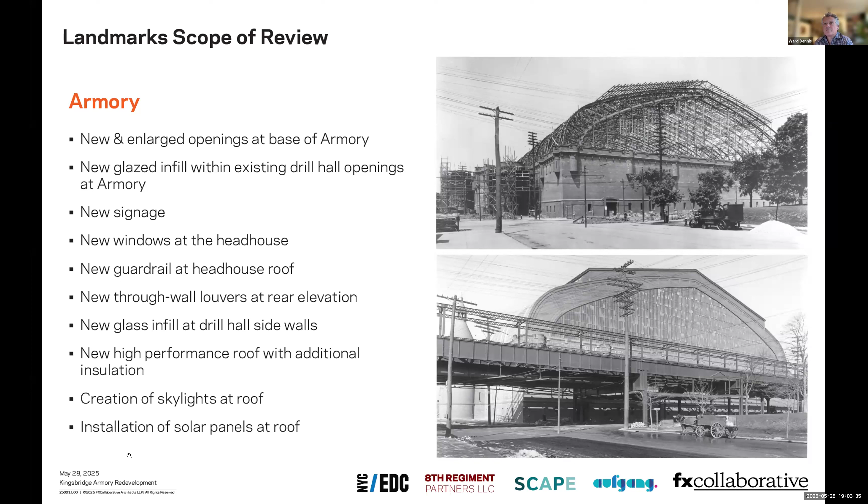And then in terms of the new construction on the north end of the site, the 2 existing National Guard buildings that you can see in the 2 photos on the right, both of which are not historic buildings, will both be demolished, and then a new residential building will be constructed along West 195th Street. There will be some connections between the new residential building and the armory with some associated removals of masonry at the armory.

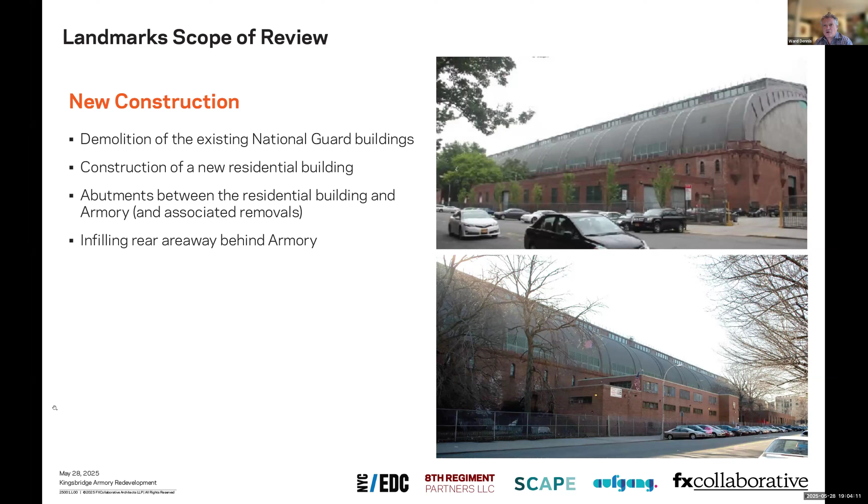And there is an areaway along the north side of the armory that will be infilled as part of this work.

And then finally, you will be seeing proposals for new landscaping and site work throughout the site, particularly along the south and west sides of the building. That part of the work is also part of Landmark's review.

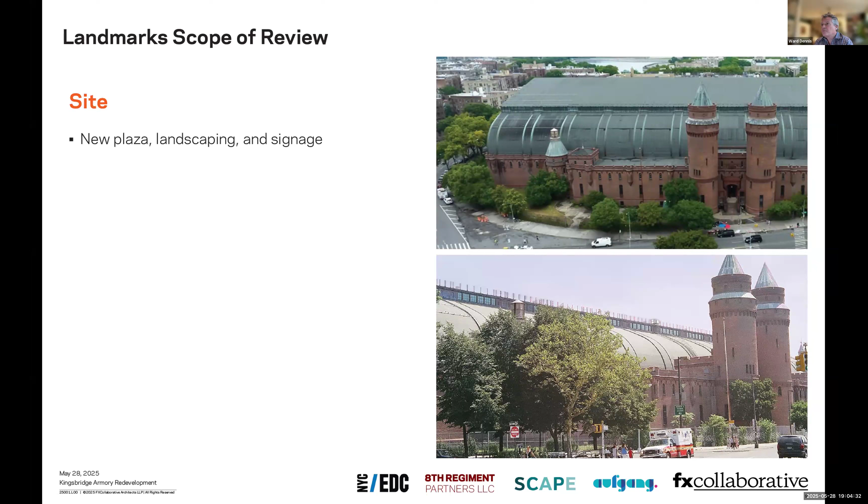So I will hand it over now to Austin to take us through the design.

Thanks, Ward. So we're going to shift now to the design vision of this project, which really begins with a set of guiding principles: building on the Together for Kingsbridge plan, making this armory accessible to as many people as possible, creating jobs, preserving history, bringing on union labor, and bringing complementary investments to this community through a variety of uses and affordable housing.

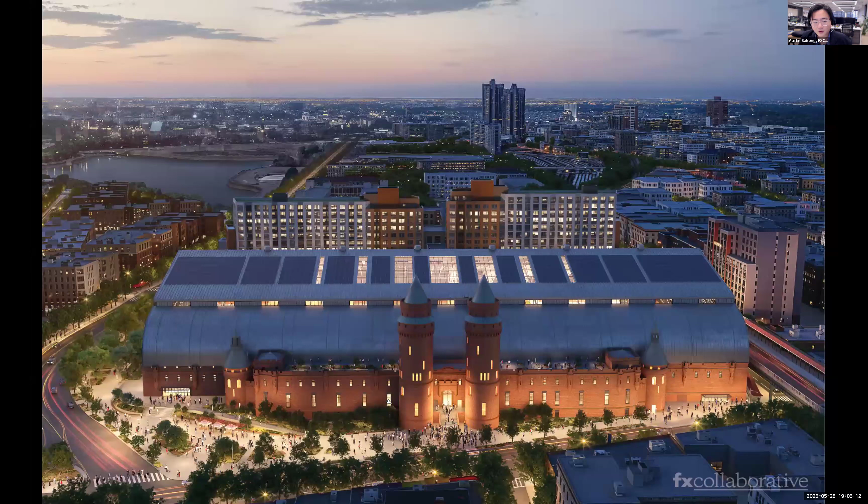So what does all that look like? We are very excited to share today how we're activating this historic structure, and we're going to get into all of it. But before we go inside, we want to start with everything that we're designing outside the armory first.

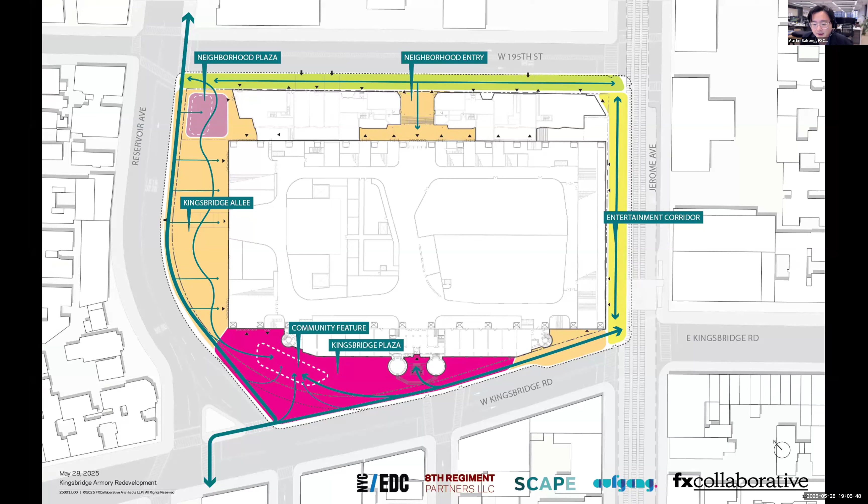We're designing this with our amazing partners at Scape Studio, and we are designing all of these open spaces, all the active public spaces that will connect to and engage the neighborhood around the site. It's a very large site, so different parts of the site are doing different things, but all of it through one cohesive open space plan and vision.

So for example, on Jerome and 195th Street, we're expanding the sidewalk. We're moving the curb out to make it safer for pedestrians. And then along Reservoir, we're creating a play plaza for kids to come over after school with a water feature.

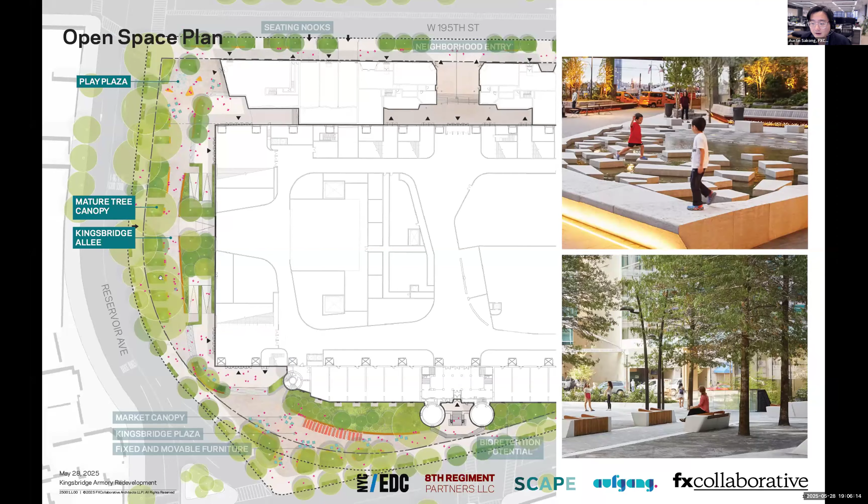We're preserving these amazing mature trees that are already there to create an urban grove, the Kingsbridge Allee, where you can sit in the shade of these amazing trees that are already there, which we're layering with additional trees and shrubs and seating.

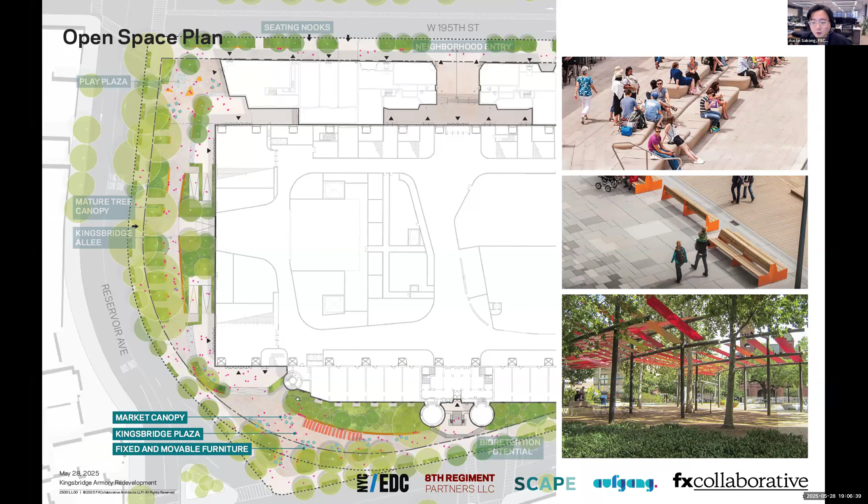And then along the Kingsbridge corridor, you may be familiar with that sort of bizarre asphalt triangle that sticks into the road. We're actually capturing that area to create a large open plaza with benches and steps and plantings and movable furniture and a new canopy structure under which you might set up a pop-up market stall or just hang out, or maybe there's a merch table for a concert that's happening inside.

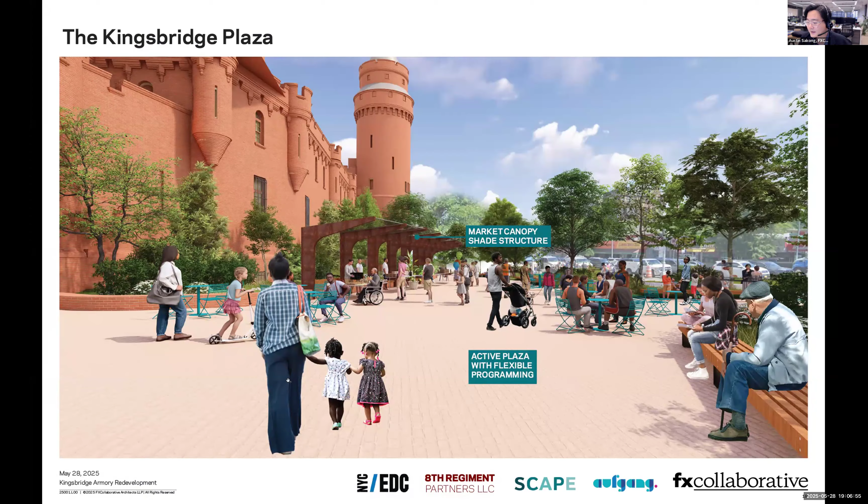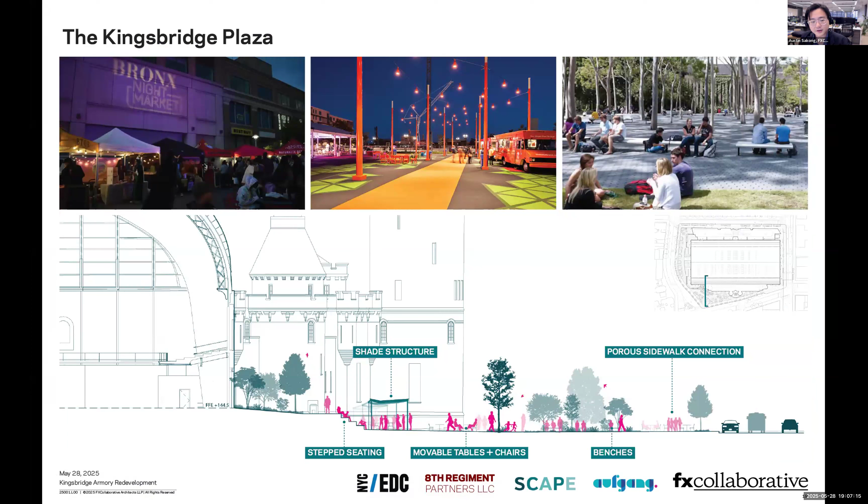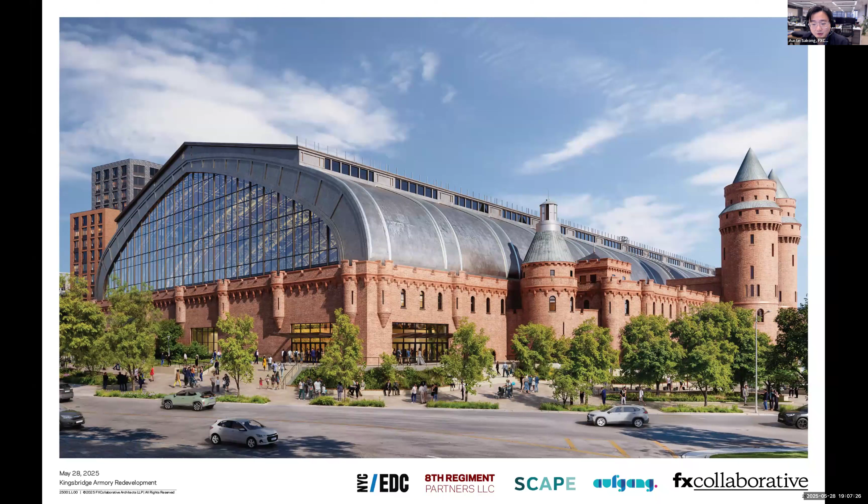It's supposed to provide a function that the neighborhood doesn't already have. So all in all, we are talking about almost an acre and a half of new, active, flexible, open public space right here in the Kingsbridge neighborhood. And this is just the outside.

Then there's all the stuff that's actually going to happen inside the buildings. And I have to say, we're very excited about this amazing set of programs going on in this project. We're talking about a new live events concert venue, big enough for 17,000 people, new entertainment and recreation spaces for people of all ages, music recording studios, cultural spaces, dedicated community spaces, spaces for light manufacturing and tech, and it's a lot.

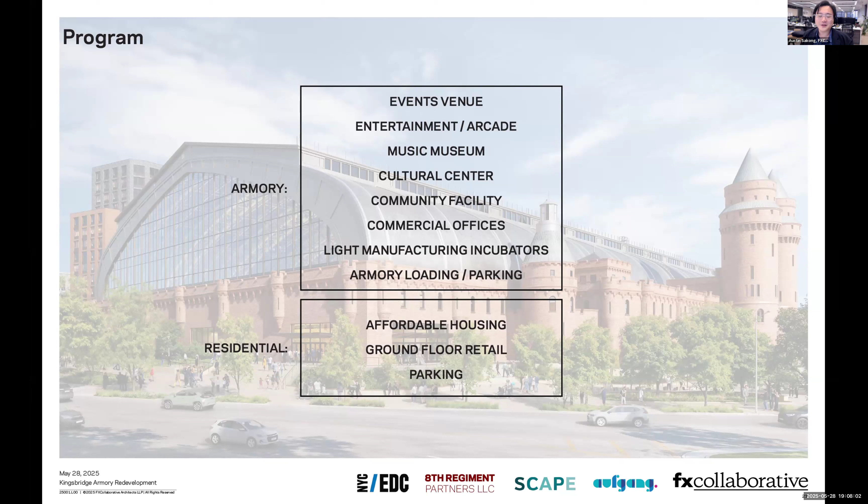So what does the armory look like when you start filling it up with all those amazing programs? Because this is what the armory looks like now.

And at the end of the day, we believe that no matter what we do, no matter what we design here, the best thing about this project is always going to be what's already there in the project, right? This amazing historic space, this amazing historic structure.

So as we started designing for all of those programs that I just rattled off, what we realized is that above all, we have really two important jobs that we have to keep here. One is to not mess this up, not screw this up. And two, make this as accessible as possible to as many people as possible. That's it, right? Do no harm.

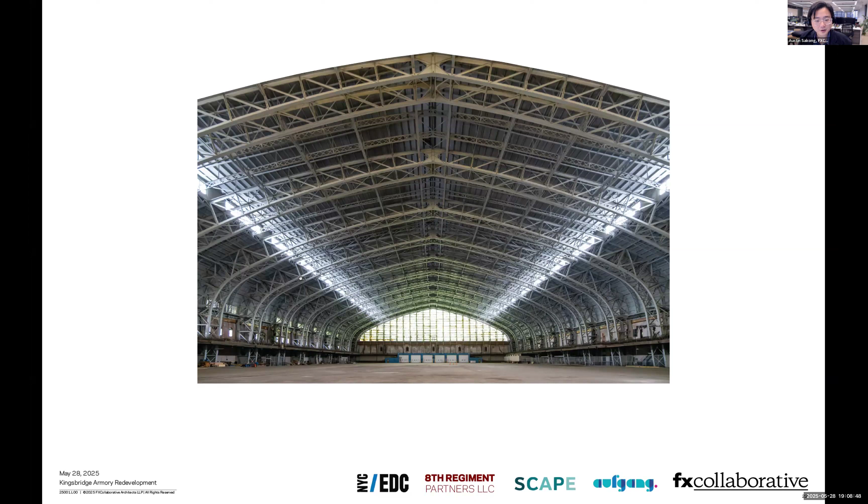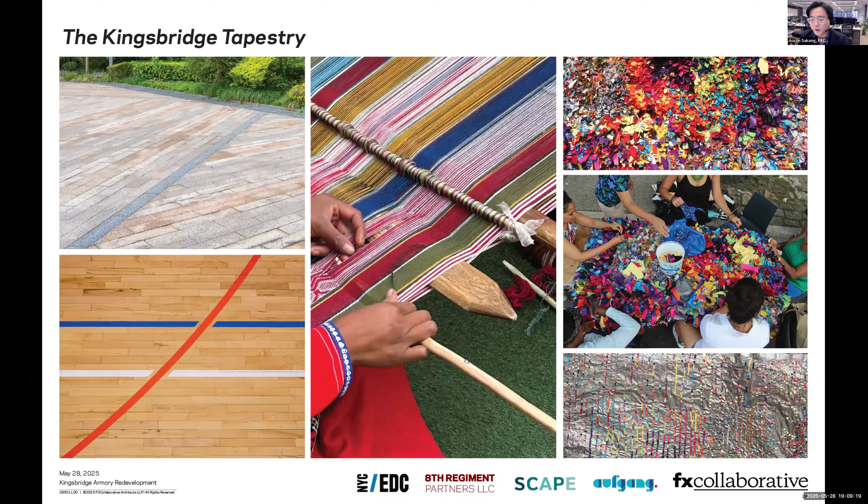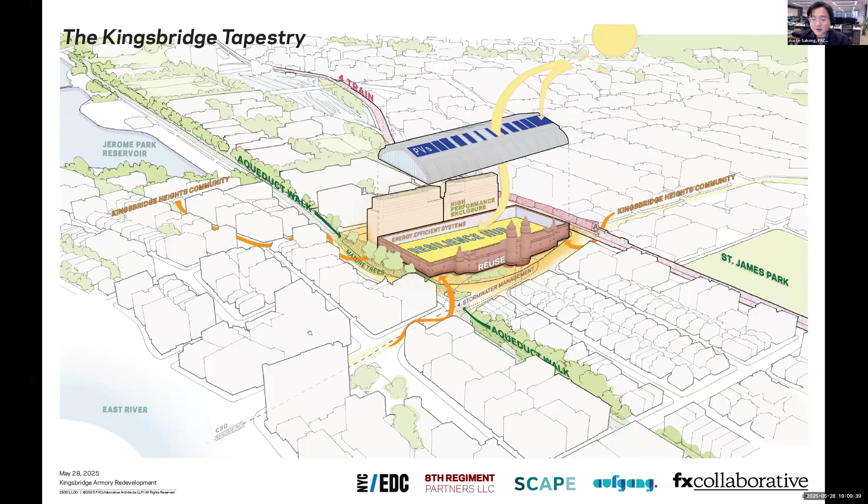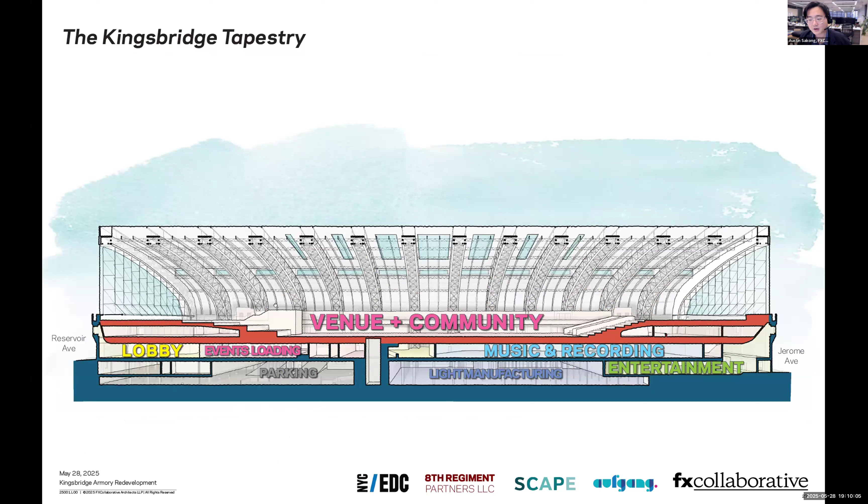It's floating inside the drill hall and bringing together, knitting together all of these different uses. So this is a kind of architectural section through the whole thing. I'm going to take you now through a series of plans, starting from the very top and working our way down. So this is the top floor.

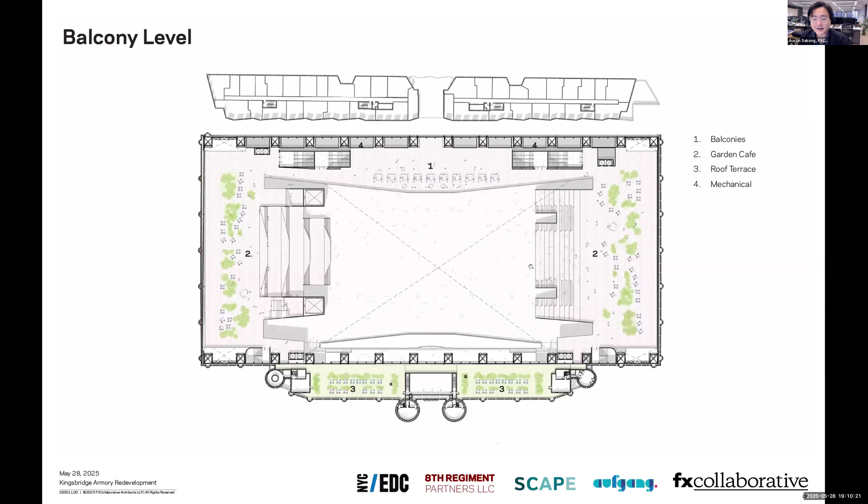This is the kind of balcony level, where we have balcony spaces that look out through those big arched windows, iconic arched windows on the two ends of the building, with garden cafes and community steps that lead you down to the venue level. And so here's the venue level.

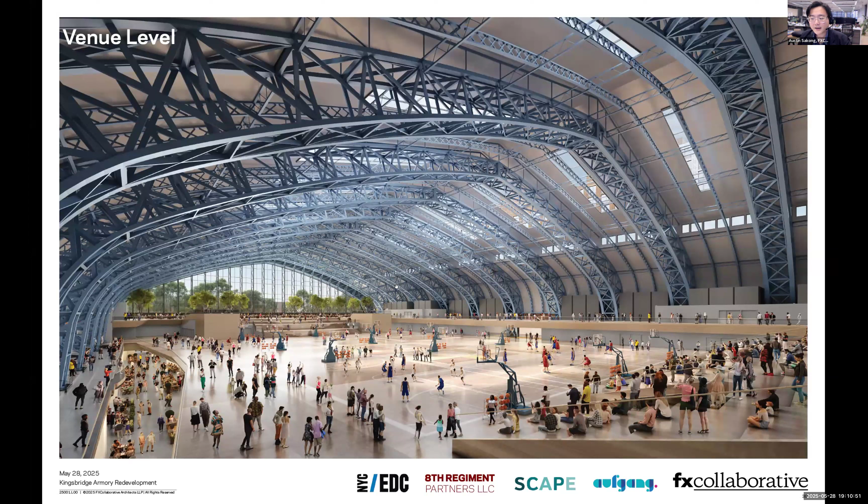So I said before that we have two jobs, right? To not mess this up and make it accessible to as many people as possible. So you can see how we're preserving this huge expanse of space. We're not mucking it up. And we're preserving something that we think is completely unique in this city. And it's super flexible.

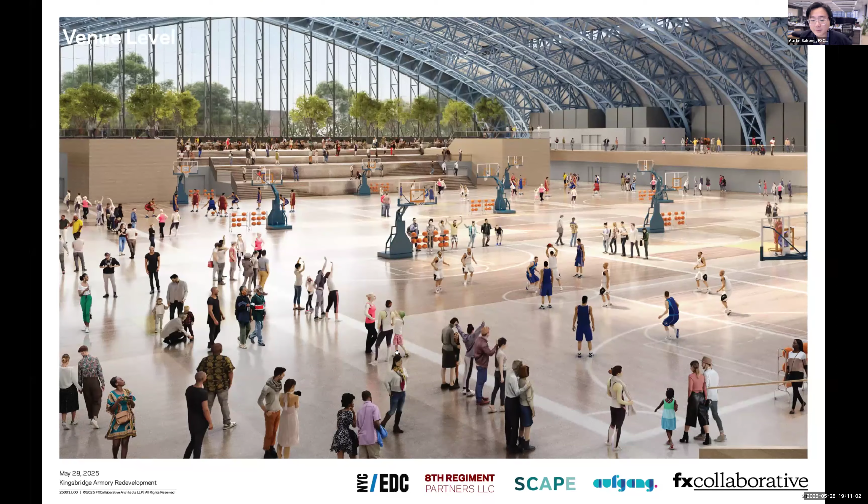So if you're a teenager who needs a place to hang out after school, maybe this is where you have practice. Or maybe this is where you are here to see your favorite artist on tour, because the Kingsbridge Armory is now the premier events venue for anyone who wants to perform in New York City. Maybe this is where the next great Bronx flea market wants to set up, or maybe this is where you have high school graduations or university convocations. You could do anything in this space.

Below that venue level space, this is really where the armory is accessible from the street. And again, the head house would be dedicated for community groups, which could be accessed directly from the historic entrance.

So these are all the community group spaces dedicated. And then the drill hall would become a kind of public concourse, activated with food and drinks, retail, entertainment, and culture.

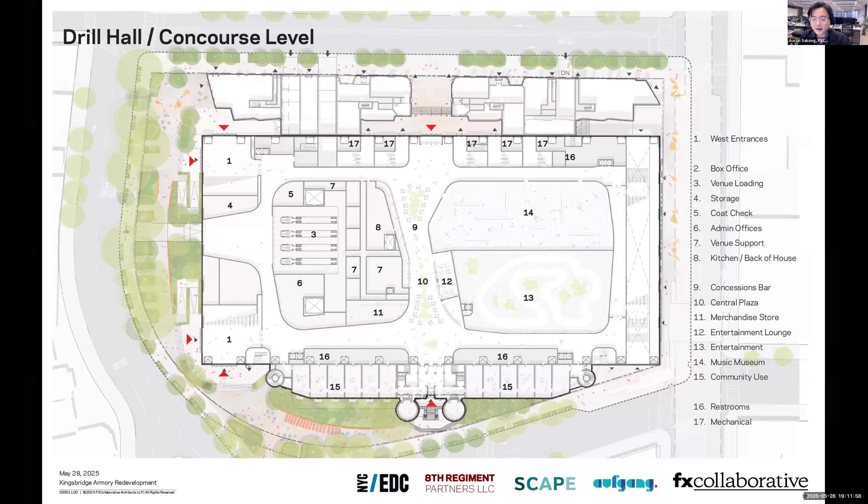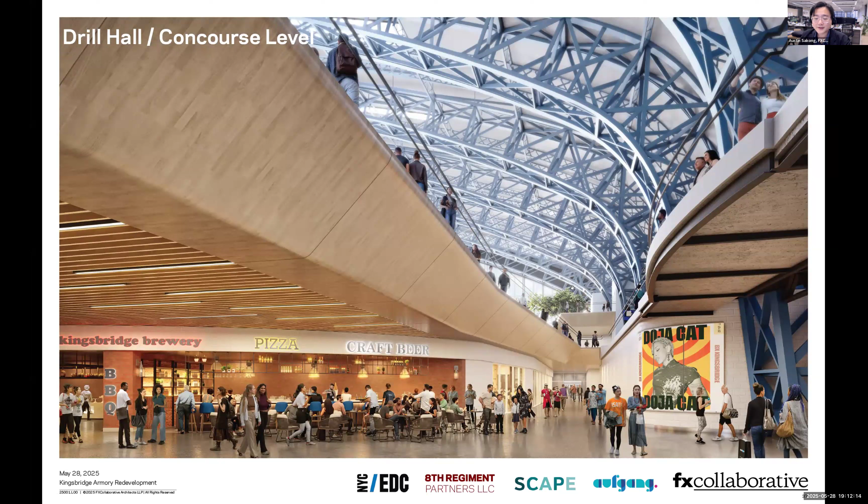This is where you'd come in directly off the street, with entrances at the corners of the buildings. You could go directly up to the venue level, or continue at the concourse level, where you can see the edge and underside of the tapestry. Even from here you could look up and experience the historic armory arches, or get a drink and grab a bite, much as you'd find in food halls elsewhere in the city.

And then alongside those spaces in the drill hall, anchoring the historic head house, there are dedicated spaces for the Northwest Bronx Community and Clergy Coalition, the Kingsbridge Heights Community Center, and Dominicanos USA.

Below those levels there are two more levels, because the sidewalk actually slopes down towards Jerome. So we have public entrances to the concourse on Jerome one level down, and we're activating the full width of the armory along this street, with new entrances and new storefronts.

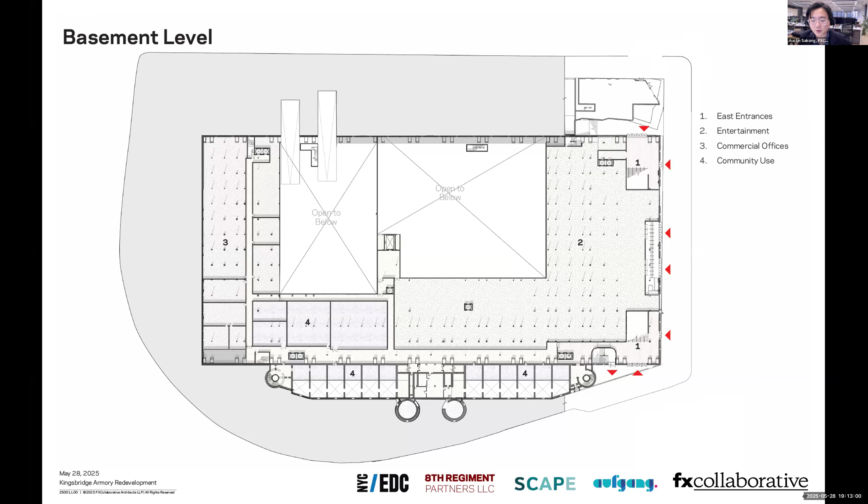Finally, a level below that, new parking and general building loading. These lower levels will also have additional programming: entertainment spaces with things like go-karts, arcades, bowling, esports, laser tag, birthday parties, and also a large new hub for light manufacturing for Bronx-based makers, artisans, entrepreneurs, and innovators.

So that's the big picture vision for the armory. To make this all happen, as you know, we've submitted our drawings to City Planning for ULURP.

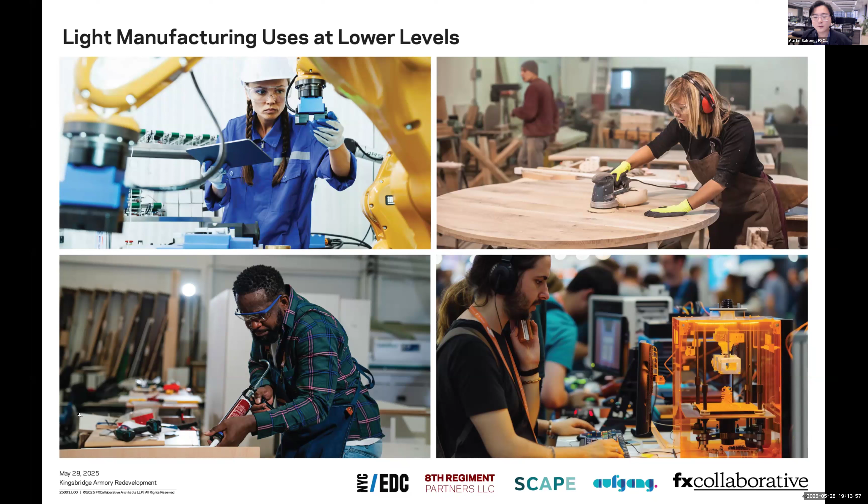In addition, as Ward noted, we are submitting drawings to the Landmarks Preservation Commission. I'm not going to do a deep dive of all the LPC drawings, but I want to show a few key samples from that set, which we're submitting to CB7 as an appendix, to give you a sense of what we're proposing relative to the historic structure.

Big picture, our attitude is wherever there's intricate, ornamental, historic stuff, leave it alone. So other than some signage on the towers and out in the landscape, all we're doing on the historic head house is replacing windows and making repairs wherever needed.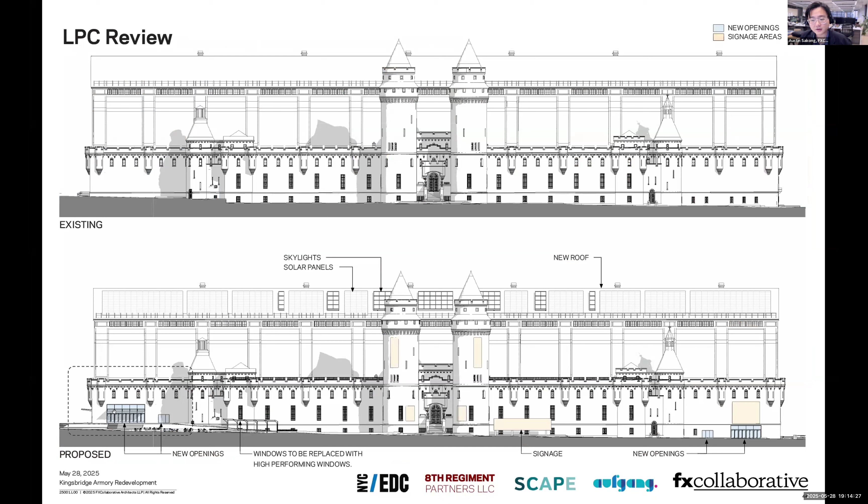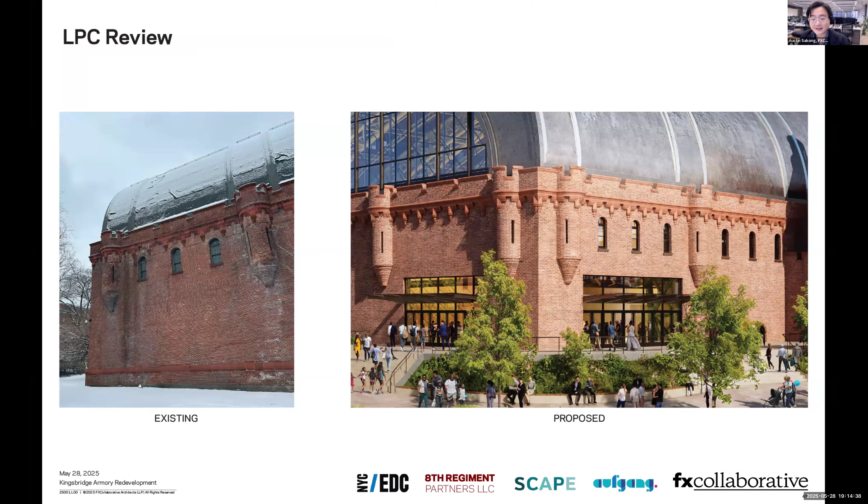Then at the corners—not in the head house, but in the body of the drill hall where we have plain, unadorned masonry—we're introducing new primary entrances, universally accessible, unlike the existing historic entrance, with new glass doors and new glass canopies. On the two ends, we're proposing to take down that awful corrugated 70s plastic in the big arch windows and replace it with glass to bring natural light into the venue.

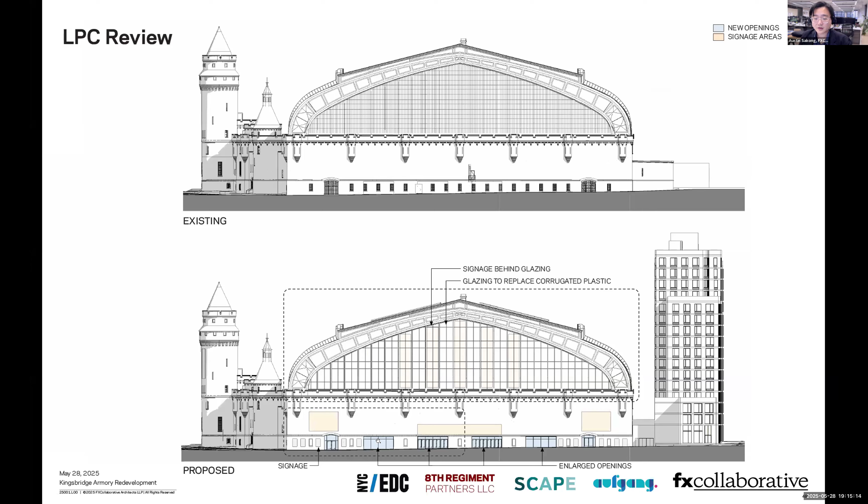And again, introducing new openings in areas of plain masonry, like here on Reservoir Avenue. On Jerome, similarly, we'll reuse the historic arched entrances at the corners, but activate the street level by turning a few of these small, punched windows into floor-to-ceiling glass storefronts, which you can see more closely here—turning this into this. You can also see where we are reserving space for signage.

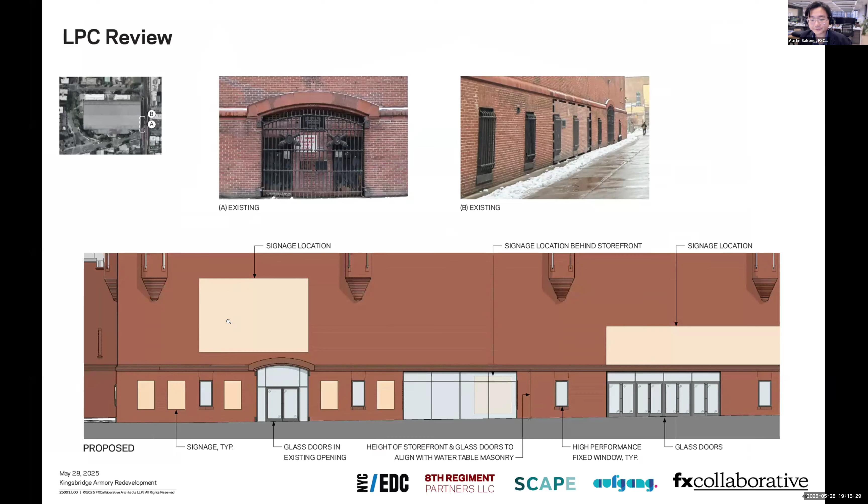Finally, on the roof we're introducing skylights and solar panels, none of which will be visible from the public right-of-way. We're re-roofing the whole thing and adding new insulation for both energy efficiency and acoustic purposes, because this will be, for many weekends of the year, a concert venue.

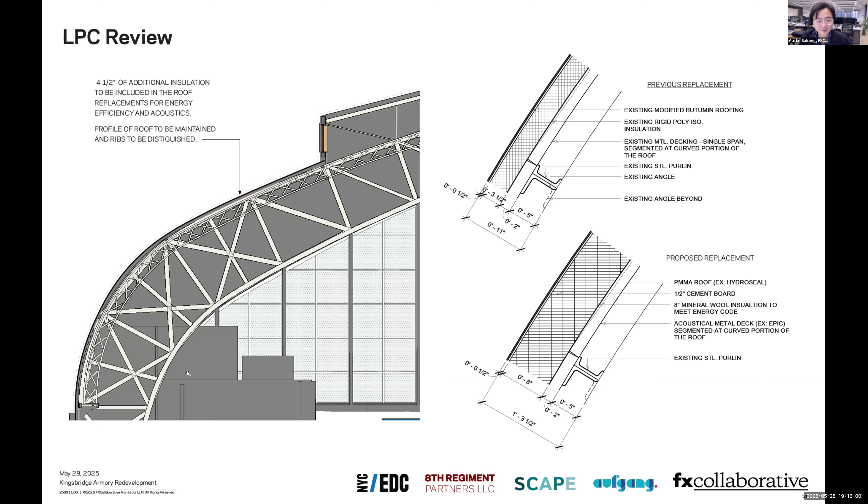Which brings me to something that might feel a little in the weeds, but I think it's important, since this will host significant concerts: how are we planning to manage all the events, loading, and trucks that come with live events? Bear with me.

We're expecting shows for about 50 days a year, but a typical show is a 2-day booking, and it takes about half a day to load one show. That means for 25 mornings a year we are loading a show. During those mornings, crew members will stand outside with flags to wave trucks in and out of the building and keep pedestrians safe.

Importantly, those trucks are unloaded four at a time inside the body of the building—they are not idling outside at the curb. There are no outdoor loading docks in this project. Once unloaded, new trucks are timed to load in just as the others go out, and all the actual truck marshaling happens off-site. On-site, we're designing this project to mitigate the impact of these trucks to the greatest extent possible.

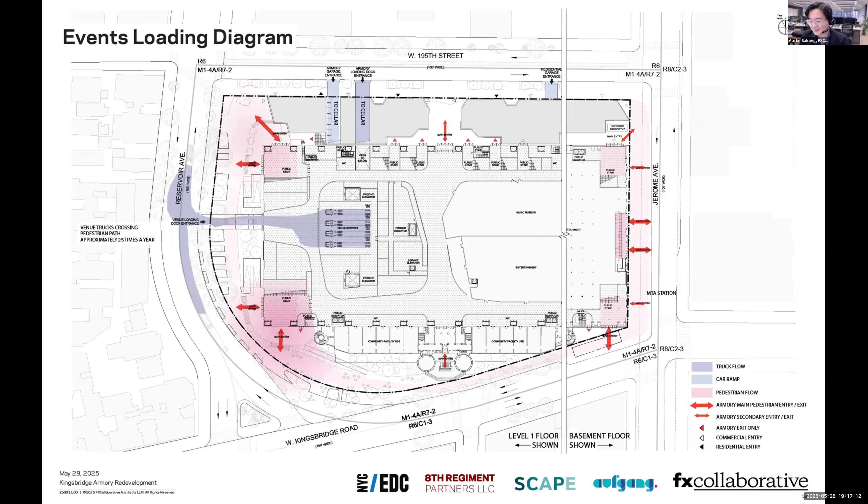I'm sure there's lots of questions about that, but we can address this accordingly. But with that, that's a big picture of the armory. Then we're building a whole building behind it, the residential building. So with that, I'd like to ask Shiva to jump in.

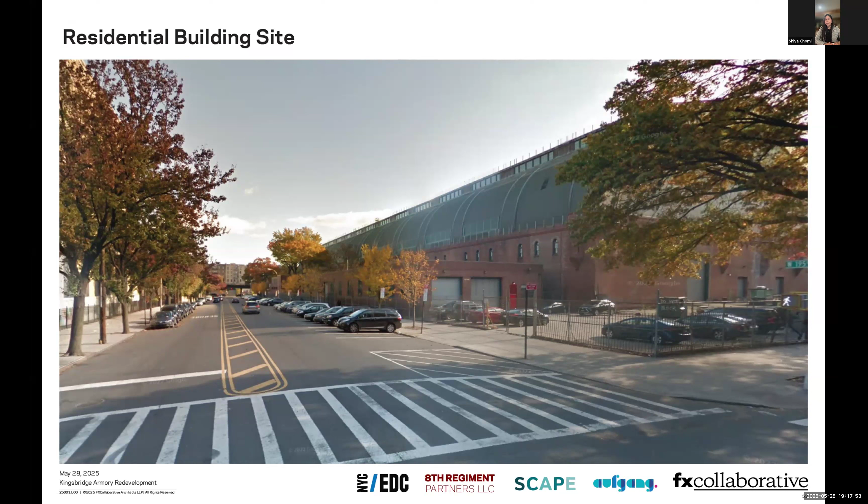Thanks, Austin. Good evening. Thank you so much for giving us another opportunity to present this project. As Ward and Austin both mentioned, we're going to have a mixed-use development on the northern side of the armory along 195th. That is the existing location for the National Guard buildings, as Ward showed you. And we are putting a 16-story building with up to 500 ELLA, extremely low and low affordable housing units there.

Can you please go to the next slide? So the whole design approach and design idea for this residential building was to make sure that we are not overlapping and we are not overarching the existing armory building. We're being respectful to the presence of the armory, the permanent presence and strong presence of the armory.

So we started with a set of goals at the top of the list: to create ground floor retail and as much affordable housing as we can on this site. So we started with a plain box.

We were trying to cut off the corners, making sure that we're not obscuring the corners and the historic elements on the armory, and creating more space for that corner plaza that Austin just mentioned.

Our next step was to create some sort of opening between the two wings of the building with respect to the two towers of the head house, giving a little bit of a breathing moment in the massing.

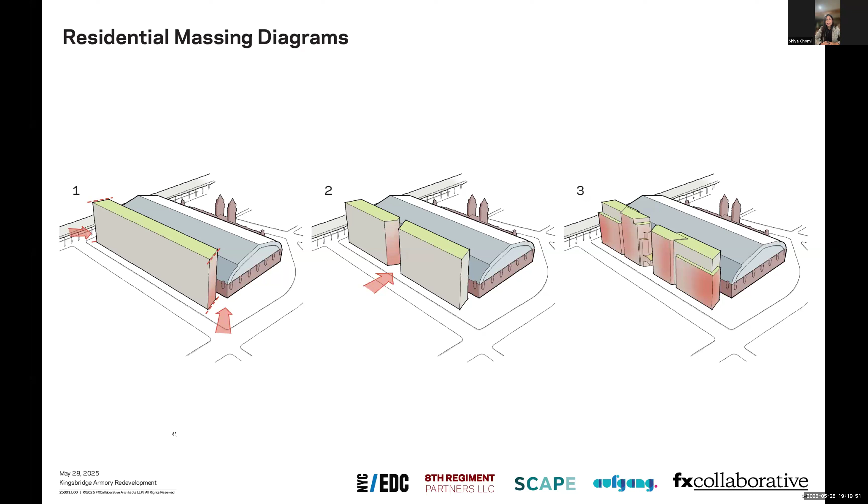If you can go to the next slide, please. So this is the overall look of the proposed residential building along 195th. As you can see, we're trying to work with different materials, getting inspired by the existing material of the armory, going with the red brick.

It was a no-brainer, but getting a little bit creative and innovative on putting potential shading on the red brick. And also for the setback portion that you see in the back on the upper levels, we're trying to follow the same concept as the material of the armory, getting a little bit more of the gray that is on the roof of the armory to be reflected on the residential building.

You can see that opening moment between the two tower portions, as we call it, for the residential building, mimicking the two towers of the head house.

These two larger portions of the residential building are being connected with a two-level bridge. That's going to be where there's a lot of amenities, and you will see a better view of it in the next couple slides.

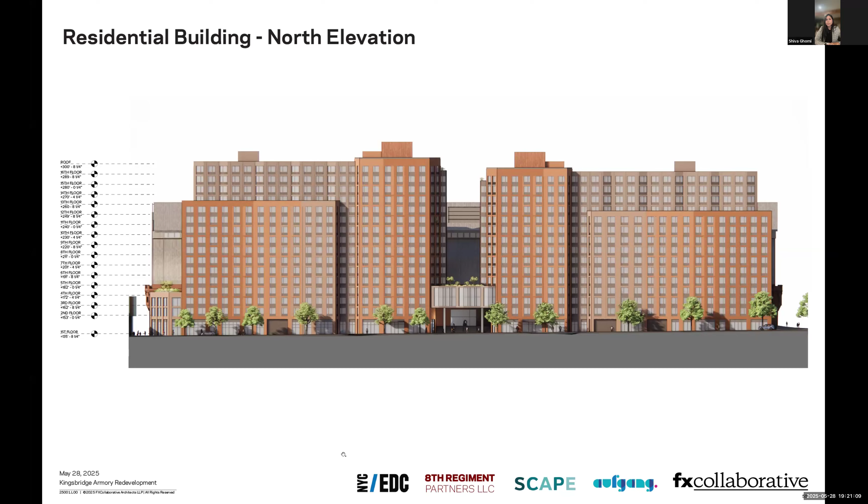Next, please. So as you can see here, you can clearly see the setback. You can see the comparison between the residential proposed materials and the existing materials in the armory. You can see that corner portion with the diagonal cuts in the residential building, opening up again for the continuation of the plaza to wrap around the site.

The whole ground floor is going to be proposed retail space, as was mentioned before, up to about 20,000 square feet of retail being offered to the community and local businesses.

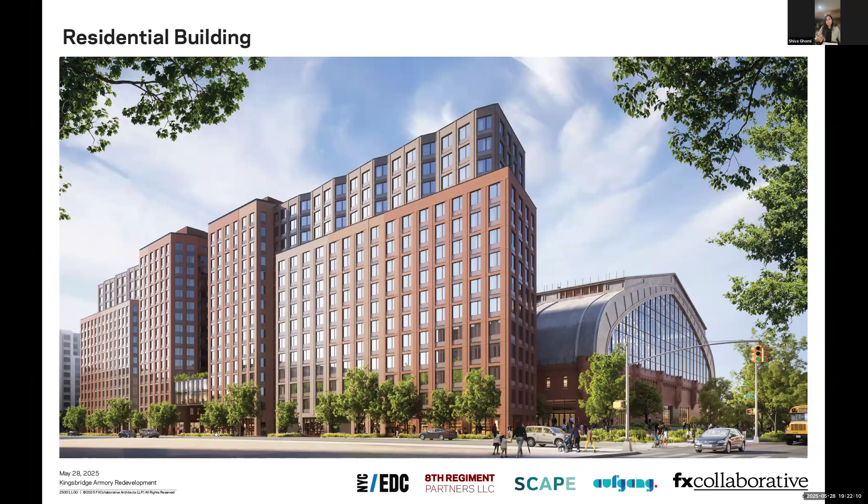There's going to be a lot of moments and openings, even cutting through the ground floor of the residential to get to the Armory, making access as easy as possible for people in the community from everywhere, from all four sides, to get inside the Armory. You can see it in the next slide.

So that's the bridging between the two wings of the proposed building. That's the moment and the uniqueness of accessing from 195th into the Armory. It's going to be designed with a set of stairs, and also be accessible with an elevator for ADA access, for foot traffic, making sure everyone has a safe and pleasant experience on the expanded and widened sidewalk. We're going to have a lot of retail space along 195th, and that bridging portion is going to be filled with amenities for the residential building, potentially with an accessible roof over it for the residents.

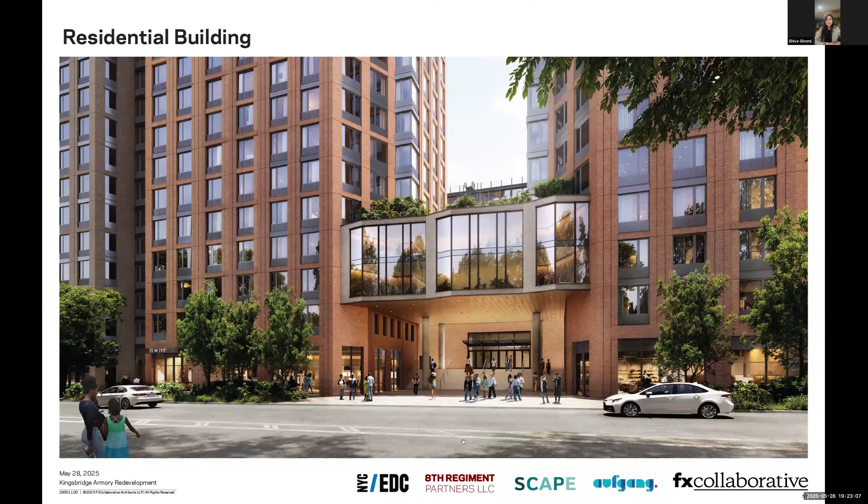Next, please. Here's a closer look. Right when you get to the top of those stairs, before you reach the entrance of the Armory, there's a moment where you see the clear sky — a 20-foot gap between the residential building and the structure of the Armory. We were trying to create these moments of openings, making sure we're being very respectful to the structure of the Armory, and not attaching the residential building all along the 195th side.

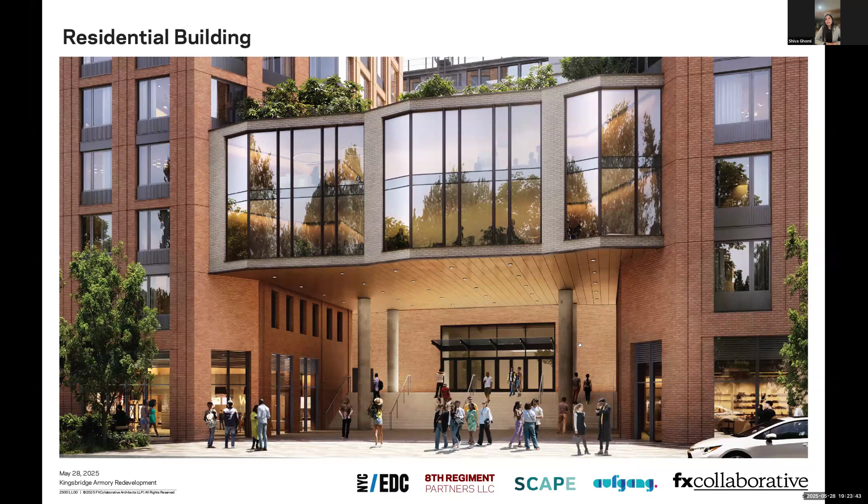Next, please. Again, this is the overall look you've seen in previous slides. As you can see, the residential building is very much blending with the background context. That was the whole design concept across the entire design team — to make sure we're not impacting the strong presence of the Armory, and we're just creating this building as part of the urban fabric in the background.

As always, the cityscape was the background to the Armory, so it's just blending with the background — you really have to stare at this image to see the residential building in the back. With that, I'm going to hand it back to Austin, who's going to walk us through some of the sustainability features of the building.

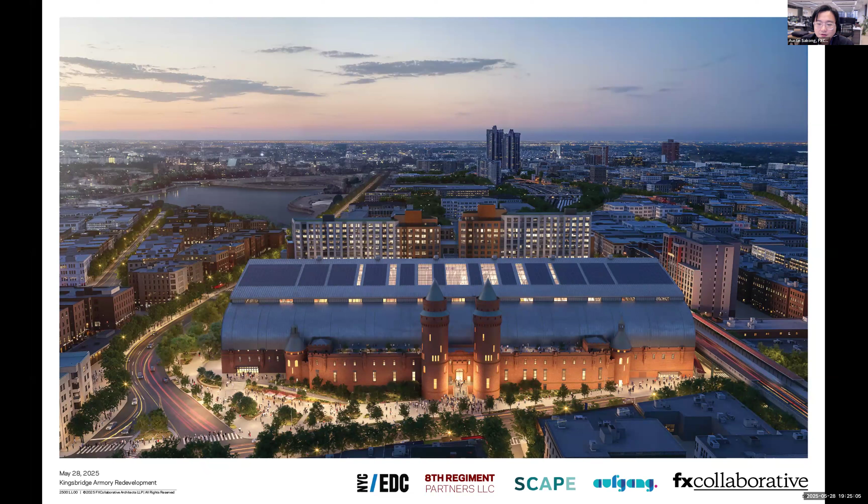Thank you, thanks Shiva. So look, there's a lot of design work happening right now — honestly, we could spend another full hour just talking about all of this. At the end of the day, though, it's really important to note that what we're doing here isn't really about aesthetics, it's about impact for Bronxites. So I want to conclude this design portion of the presentation with a summary of what makes this a sustainable project, because this is a project that I think should be a model for decarbonizing buildings like this all around the city.

We're going fully electric, we're aiming for LEED Gold, and even at this early stage we're integrating sustainable features like solar panels and energy efficient mechanical systems. That decarbonizing also extends into the landscape strategy, because those mature trees we're preserving — about 20 of them we're fighting to keep on site — the city estimates trees like that absorb almost 50 pounds of CO2 a year. And we're planting 60 more. It's this notion that the landscape is also a form of infrastructure that supports air quality, biodiversity, pollinators, and resiliency. So again, just to think about this as a high impact project.

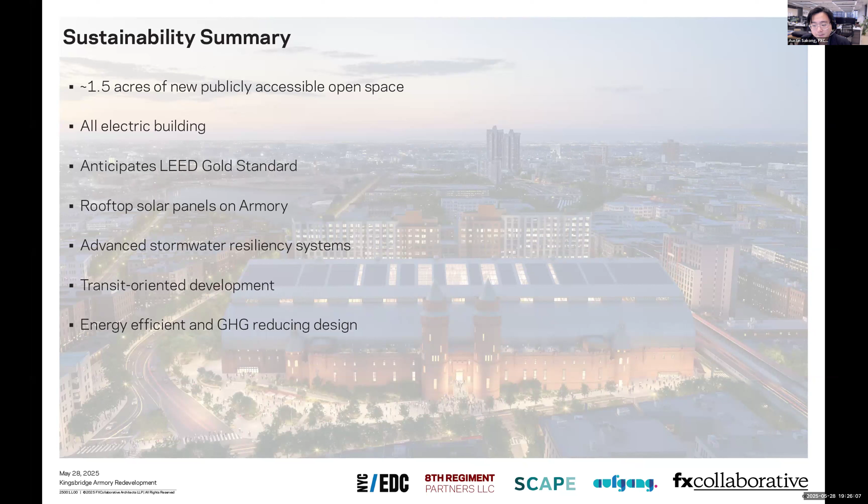With that, I will turn it over to Lauren. Hi there, Lauren George, C&B Consulting. Just to piggyback on some of the things Austin already alluded to with the users — the really exciting mix of prospective users that the 8th Regiment team has worked really hard to engage with, and has LOIs.

We're talking to Dominicanos USA to also have a significant footprint, to have a gaming lab and create tech and esports training opportunities for youth, as well as doing their civic participation work that they have expertise in. And of course, also the organizing and diversity of empowerment roles that Northwest Bronx Community and Clergy Coalition does, they're going to be bringing here and putting on a variety of programming that'll be informed by the community as this moves forward.